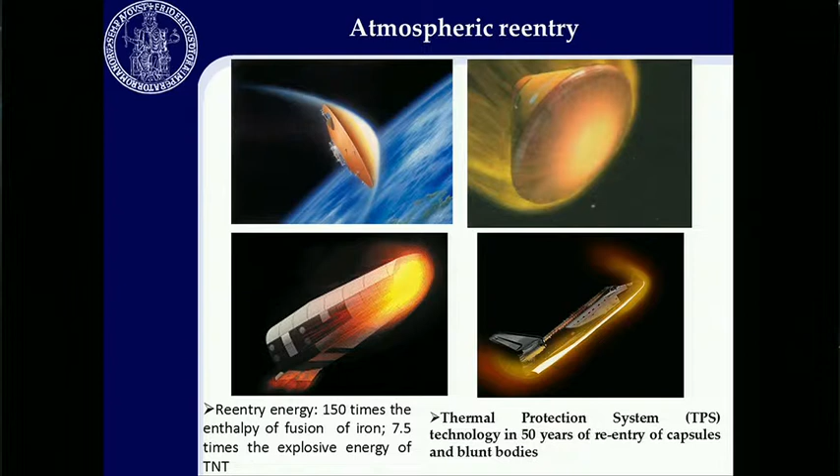So one of the most important parameters that we have to take into account is the so-called ballistic coefficient, which is the ratio between the mass of the vehicle and the exposed surface area. The idea to have a deployable re-entry capsule is in order to increase this area. So we have one big advantage, which is the very easy accommodation in a launch vehicle, but the possibility to deploy this umbrella before re-entry in order to reduce this ballistic coefficient and to convert this very high energy in a very long trajectory at high altitudes where the atmosphere is more rarefied, reducing the heat loads and the mechanical loads.

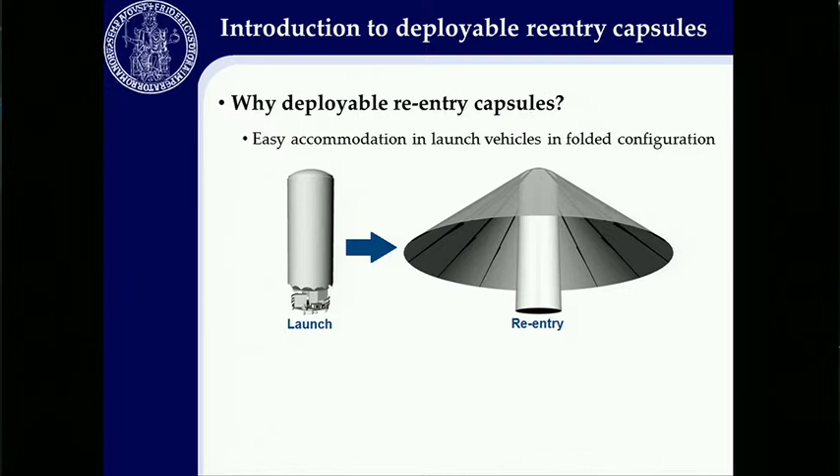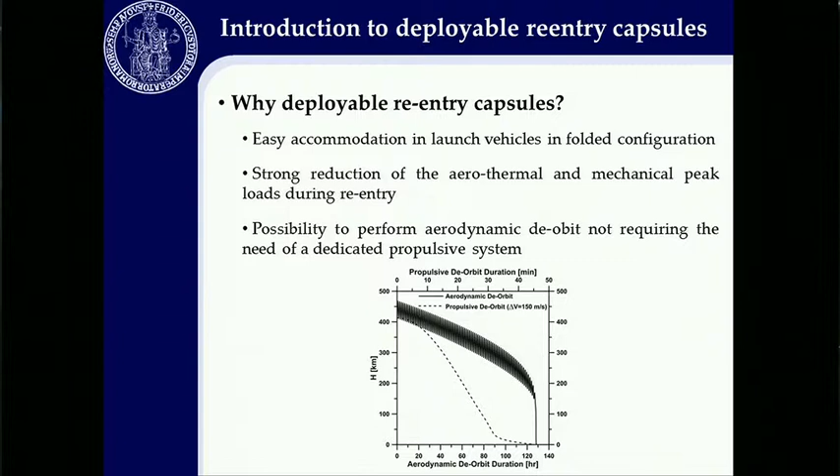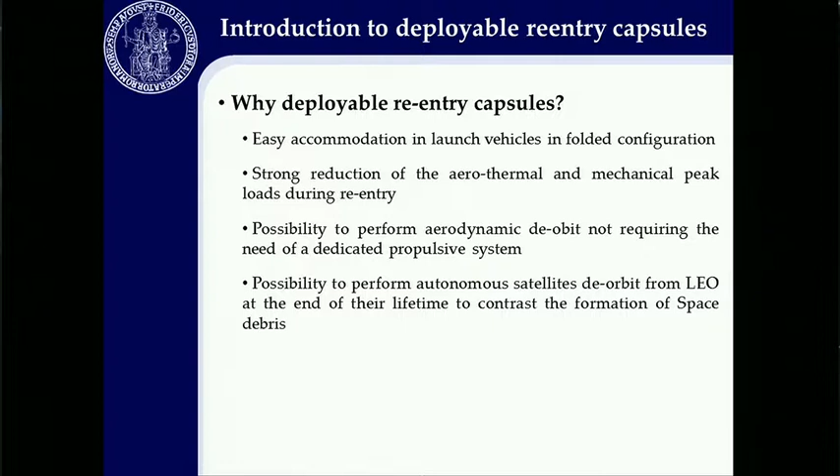So another advantage is, of course, the possibility to perform aerodynamic deorbit without any dedicated propulsive system, and this is safe for sure. And last but not least, another advantage is the possibility to strongly reduce the lifetime of satellites after the end of the mission in order to contrast the formation of space debris, which is one of the most important problems in space today.

So coming back to the potential missions, we have been investigating, first of all, space mailing from the ISS, as was mentioned before by Marraffa from the European Space Agency. In this case, the capsule can be launched, stored in the space station, ejected from the space station, and when the shield is deployed, the deorbit happens. So this energy is gradually dissipated in a very long time before reaching the atmospheric entry interface and then finally landing at the landing site.

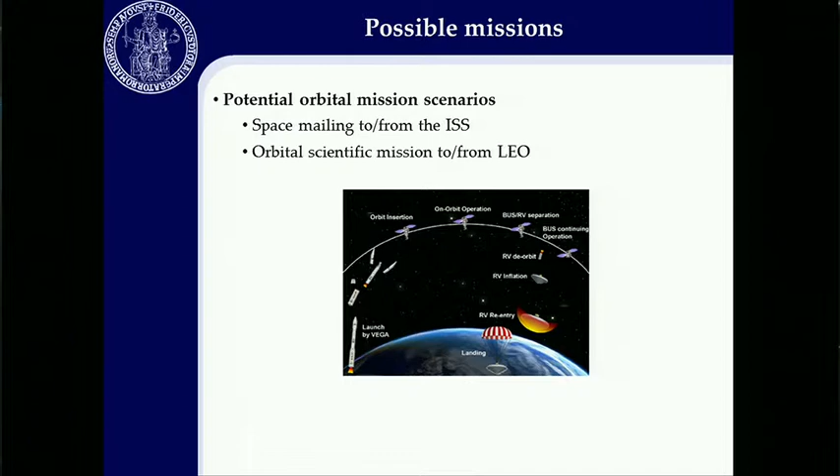A similar mission, but a little bit different, is an independent orbital scientific mission. In this case, the capsule performs a dedicated experiment in low Earth orbit, and after the experiment is recovered. Another possible application is for Earth observation, in the case of quick access to space into a specific orbit. In this case, we are talking about very short missions where an enormous amount of data can be collected and recovered safe on ground.

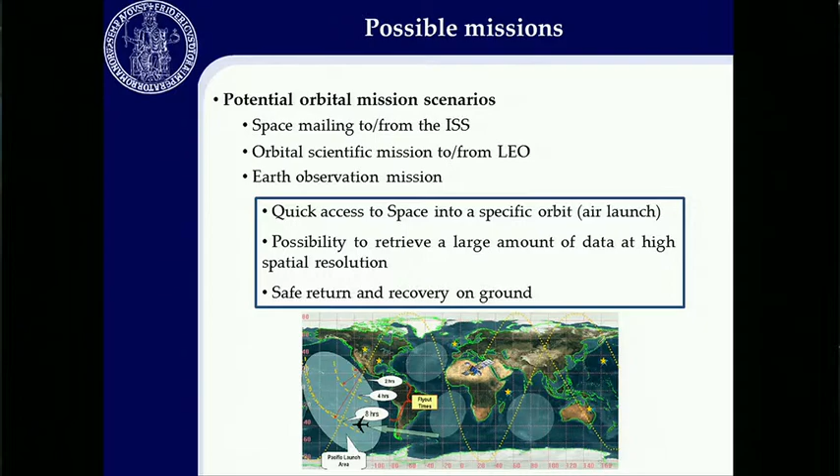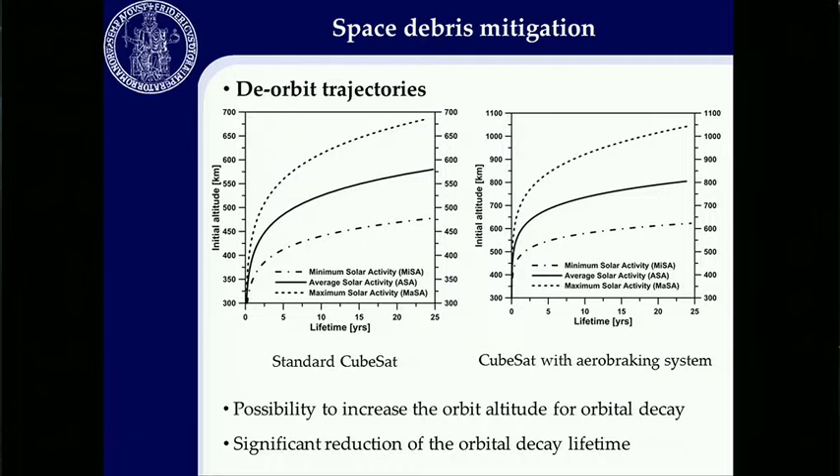As I was mentioning before, some studies have been performed in order to look at the problem of space debris mitigation. This is just a slide to show how different the lifetime of a CubeSat is. CubeSats are very small nanosatellites in the order of a few kilograms that typically must be recovered in not more than 25 years. In this case, this is the maximum altitude that can be reached without any deployable system. With an aerobraking system, we can strongly increase the initial altitude of the CubeSat, and this is a very good advantage.

For what concerns the deployable systems, in the Campania region, there is a project which has been funded by the region and that will be carried out in the next 3 years. That is looking at the study and development of an air-launchable nanosatellite with recovery capability. In this case, the main idea is to have this satellite which performs the mission in a low Earth orbit. After the mission, the aerobrake is deployed, and the capsule can be deorbited and controlled during the orbit trajectory.

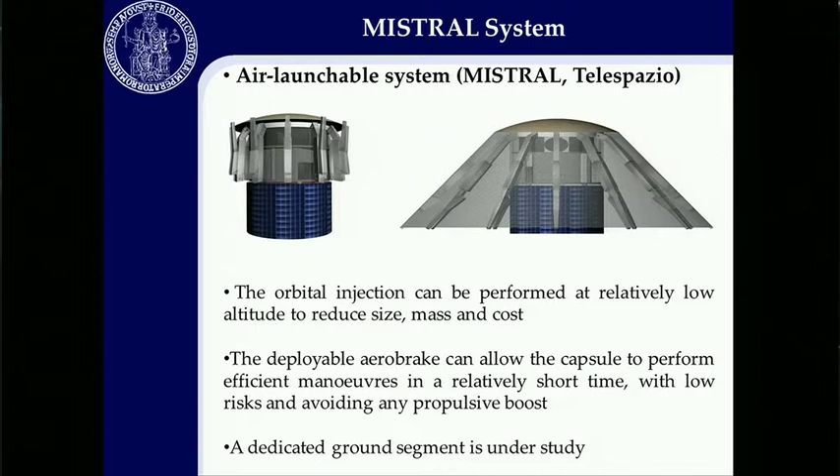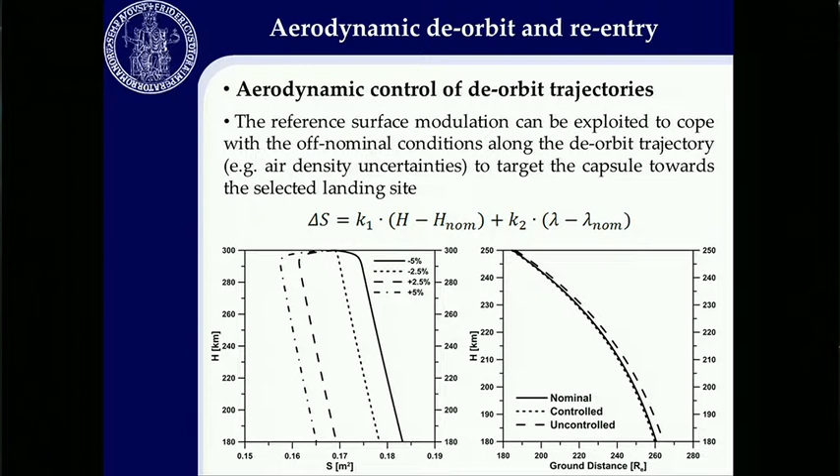This is a slide that shows how the umbrella can be modulated in order to control the re-entry trajectory up to the final landing destination. These are some plots of the numerical prediction. We can see how many orbits are carried out during the deorbit maneuver. These are the computation of the final leg of the trajectory, where the capsule reaches the peak heat flux and the peak heat load. But what is important, as I mentioned in my introduction, is the possibility to reach sustainable heat flux and heat loads.

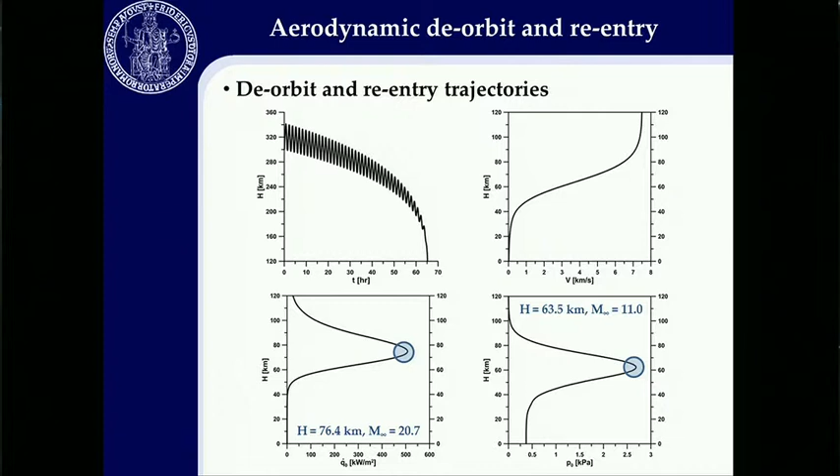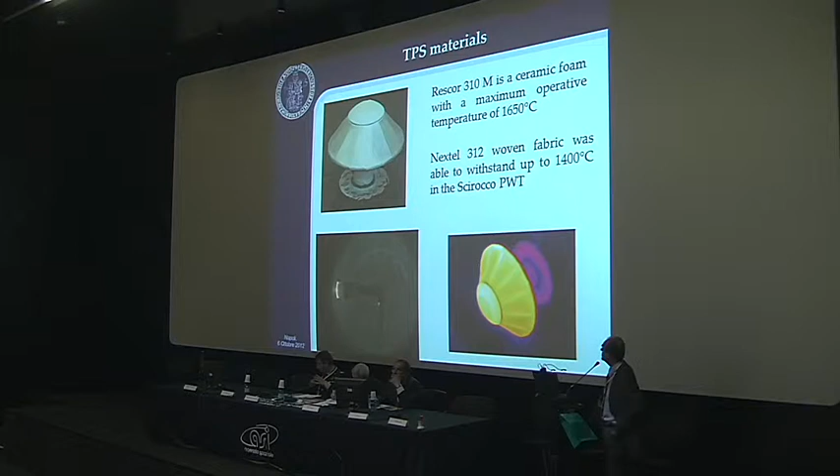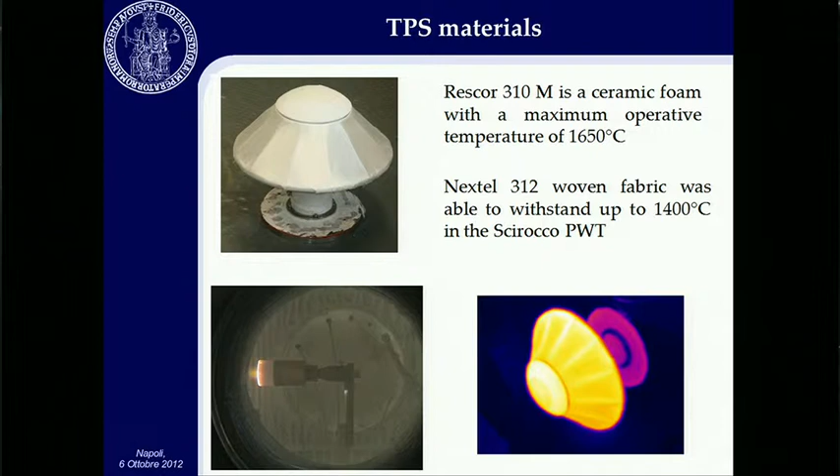These heat fluxes can, of course, be computed by conventional CFD analysis. What is important is that these heat fluxes can be affordable by existing commercial materials. So we don't need very special technologies since the temperatures are relatively low. These are off-the-shelf materials that can be procured, that we have tested. The left sketch is in my plasma wind tunnel in a very short scale. The right one is a test that has been performed in the Scirocco with a larger model. But these tests have shown that the heat fluxes and the heat loads that can be sustained are affordable.

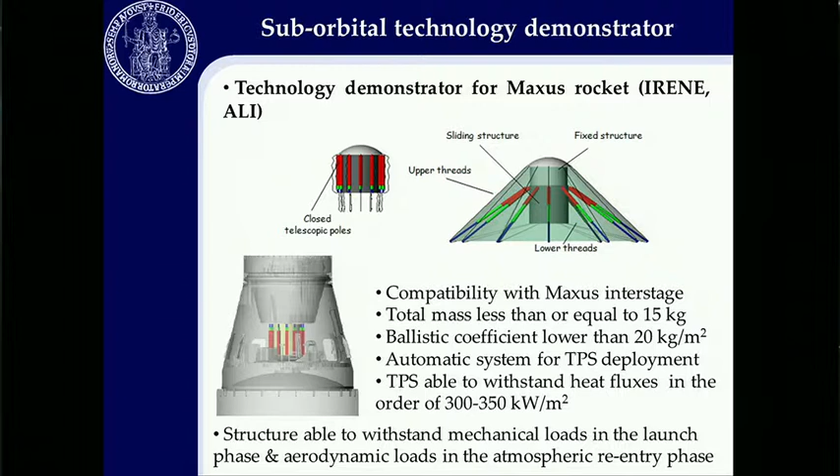As I mentioned before, there is a project that has been supported by the Italian Space Agency and now is under study by the European Space Agency, which is coordinated by the Aerospace Laboratory for Innovative Components, ALI, which is located in Naples. And the main target of this project is to develop a suborbital demonstrator of this technology. The idea is to place this model in the interstage between the payload and the motor of the Maxus sounding rocket, which is typically utilized by the European Space Agency in coordination with the Swedish Space Corporation and the German Aerospace Research Center.

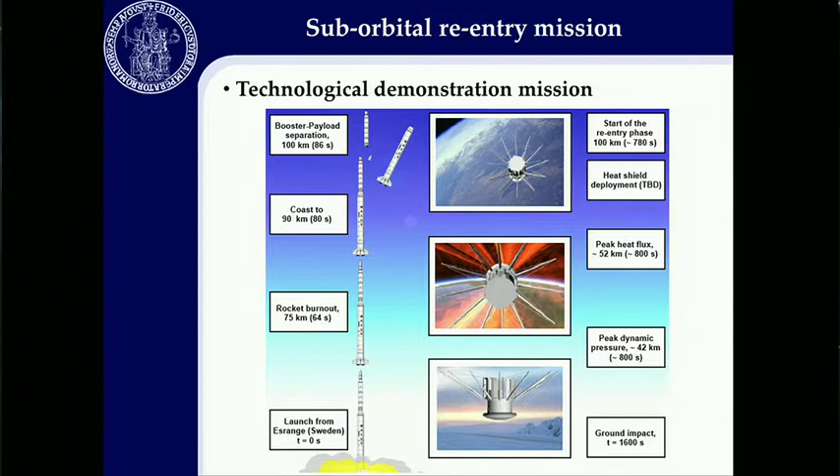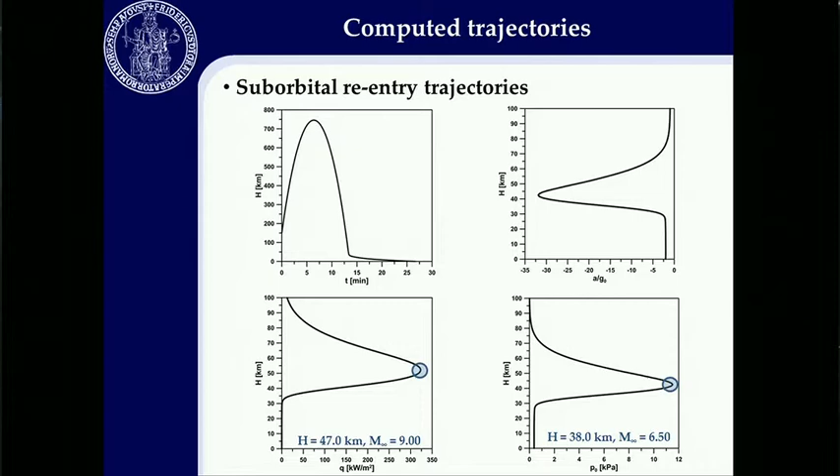This is typically dedicated to microgravity research, but there is the possibility to place one ejectable payload at the interstage so that in the ascent trajectory of this rocket, the capsule can be ejected after the altitude is in the order of 100 kilometers. So the capsule can perform an independent mission up to the final landing site, which is normally in the north of Sweden. Okay, so these are calculations, these are studies. In this case, since we are talking about suborbital reentry, not orbital, the energy is less, but in any case, the heat fluxes and heat loads are quite comparable, and some technologies can be tested. I see that the light is on, so I try to accelerate my presentation.

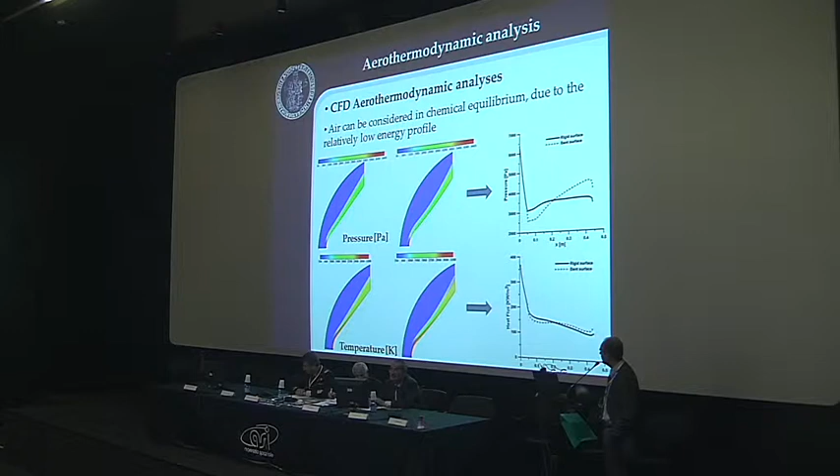It's not important to go into details of the numerical activities that are ongoing. I just would like to conclude this presentation mentioning the parallel activities which are now ongoing by a group of my students in Naples, master and PhD students, that are studying these problems, and they intend to prepare a proposal to the European Space Agency for the next announcement of opportunities. This is a similar sounding rocket, not the biggest one that we have seen before, not the Maxus. The name is Rexus. That is a much smaller rocket, and it is launched twice a year from Kiruna in Sweden.

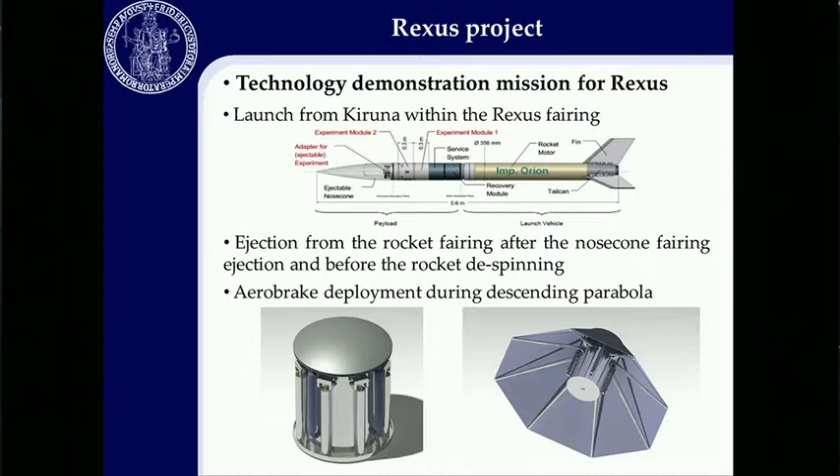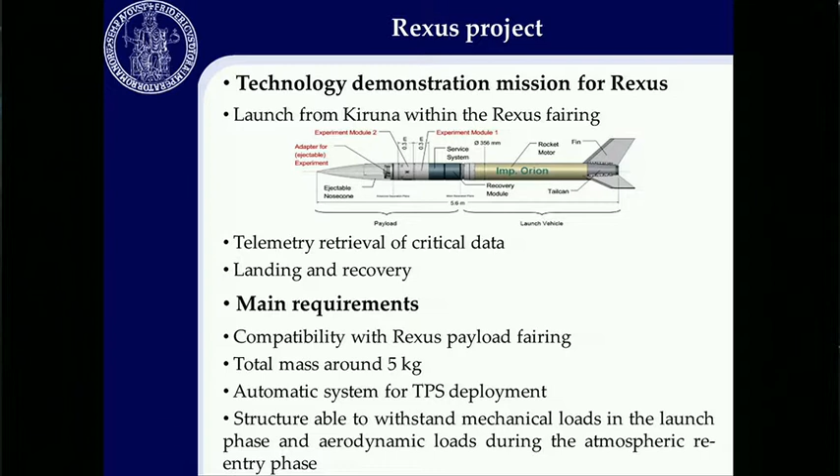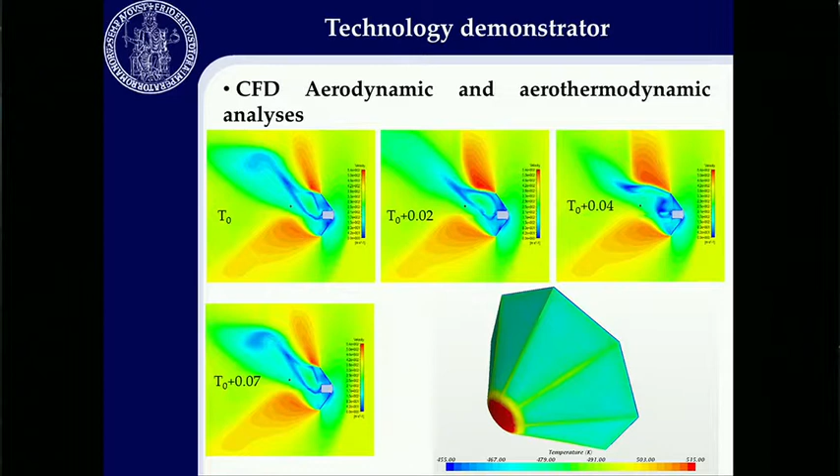This campaign is typically open to students coming from universities of Europe, and my students want to propose a similar project at the student level in order to gain some experience. Of course, in this case, the trajectory has much less energy because the apogee is in the range of 80 kilometers. So as you can see from these requirements, their system will be much lighter, 5 kilograms, but most of the main ingredients are in the same concept. They are doing numerical computations, preliminary analysis, and they are also preparing some scaled models. This is a sub-scaled model that they have developed with 3D printers, and they intend to also do some aerodynamic tests in wind tunnels and to prepare this campaign for next year.

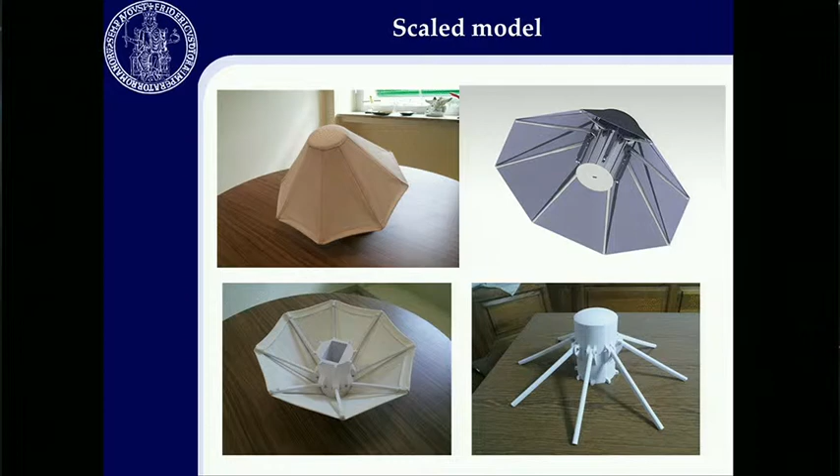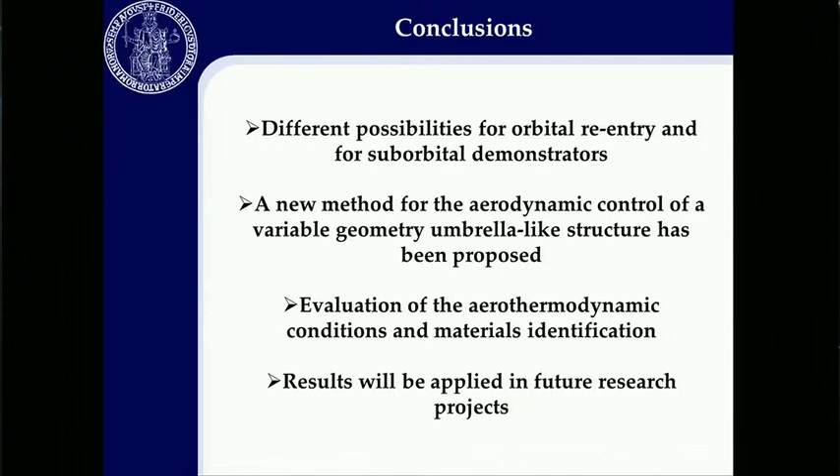So this is the conclusion. We have investigated different possibilities for orbital reentry and for a suborbital demonstrator. This technology, in our opinion, is an important technology for the future that opens many possible applications. We have seen some applications, but also, for instance, interplanetary missions or re-entry not from low Earth orbit but at higher energy can be investigated if the concept is successful. We have identified for the moment a number of off-the-shelf materials, and we hope that these results will be applied in future projects.